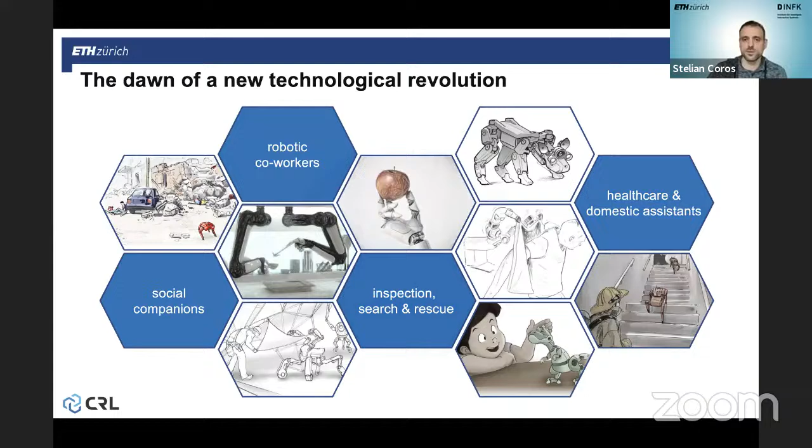If I had to summarize the work that we do, we split it up into three different pillars. First of all, we do a lot of work in physics-based simulation. Here, the overarching goal is to use these new simulation models to enable machines to understand how physical objects move and deform, to have the same kind of innate understanding that we do.

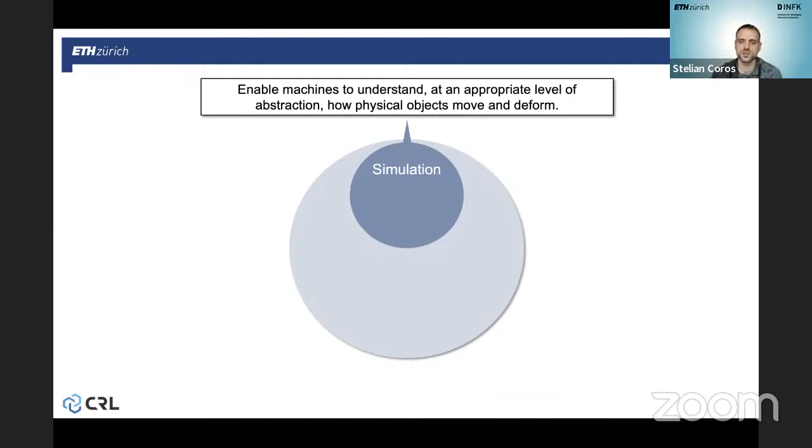Whether it is that we are folding a t-shirt or cooking our dinner, we always have an understanding of how the objects we interact with will behave. Using this understanding, we are able to plan and execute motions. In the simulation models that we're developing, I'm always interested in understanding how to make the most of the information that simulation models give us.

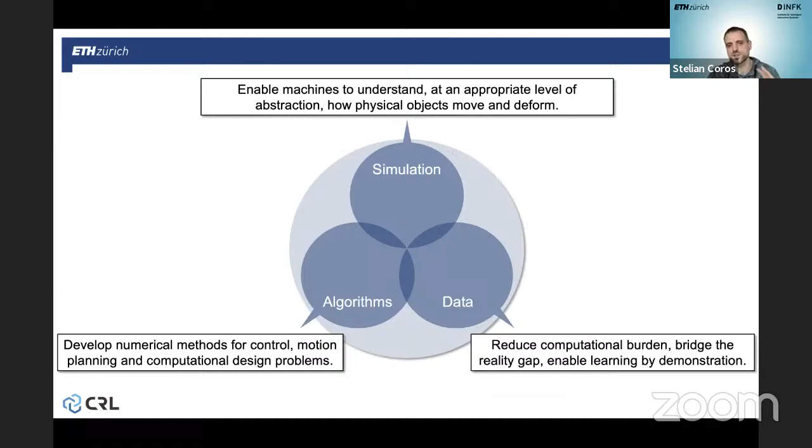Building on these simulation models, we develop all sorts of new algorithms for motion planning, for control, and also for computational or algorithmic design for new types of robotic systems. We also use data as much as possible to reduce the computational burden, to bridge the reality gap, to enable learning by demonstration, and so on and so forth. It's this fusion of simulation, algorithms, and data that we call computational robotics.

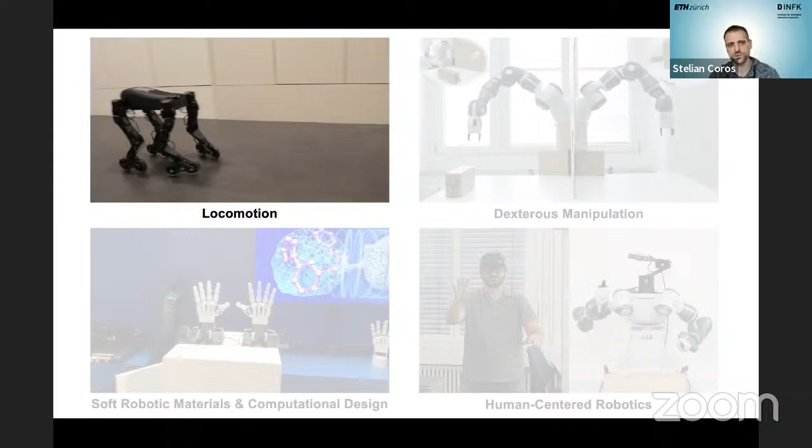In terms of the types of problems in robotics that we look at, we classify these more or less in four different areas. One is locomotion or mobility. Here, the overarching goal is to make robots that are able to go wherever people go. So for this purpose, we study all sorts of mobile platforms, whether it's legged robots or wheeled robots or hybrids, as we see here in this example.

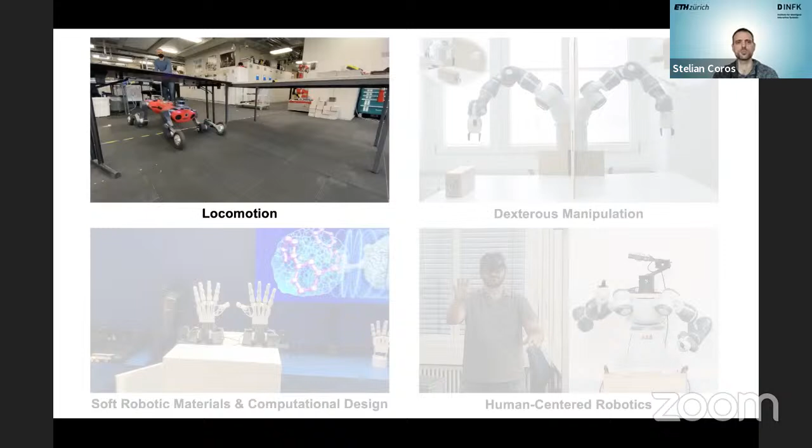We always try to figure out how to make these robots as agile as possible. And now increasingly, we're looking at mobile manipulation problems. So we want robots that are not just walking places, but are also able to start interacting with objects around them.

Speaking of manipulation, we have a dedicated focus in this area of dexterous manipulation. And here the goal is to make robots that are as skilled as people are. Hopefully we get there at some point.

And in my group, we focus a lot on agility and also manipulation of non-rigid objects. So we see lots of examples here. This is a dynamic behavior. This is another one. This is an example of interaction with a deformable object.

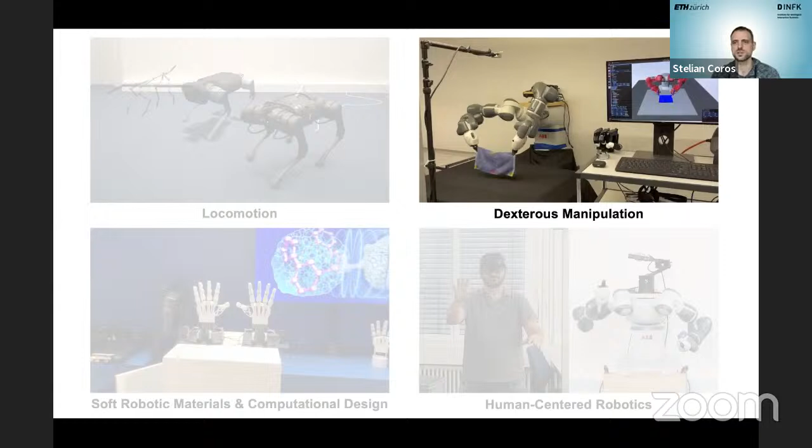So these are snapshots of the type of research that we do. And also we're trying to figure out how to create robots that are able to execute long-term motion plans.

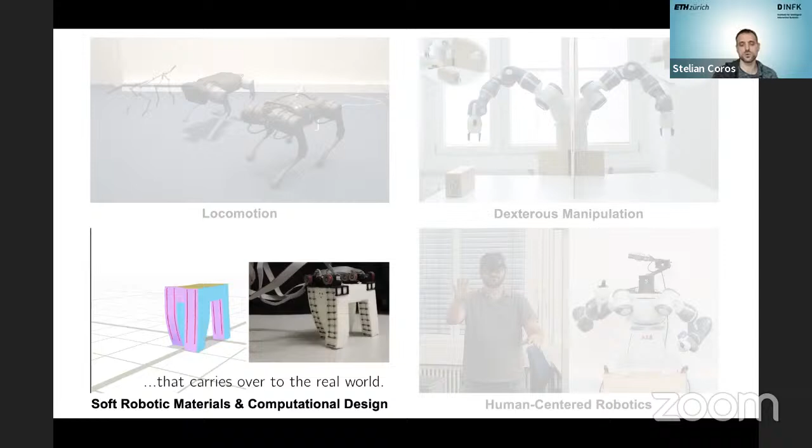We also have research in this area of robotic materials, and here computational design or algorithm-driven design is very important. So here we're inspired by new capabilities that are enabled by digital fabrication technologies that allow us to create entirely new types of mechanical systems. Compliance is kind of one of the defining traits of the systems that we study.

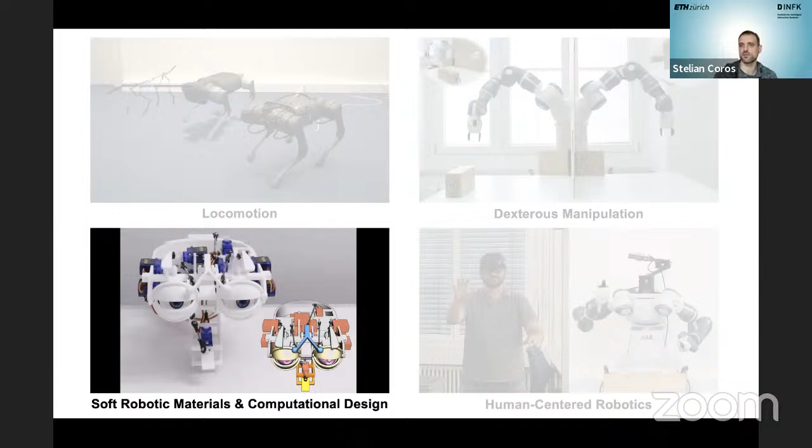And in this area, the space of design possibilities is very large, and typical engineering approaches that rely on creating a prototype, fabricating it, testing it, and then figuring out how to improve it, they no longer scale when you have access to thousands of design parameters.

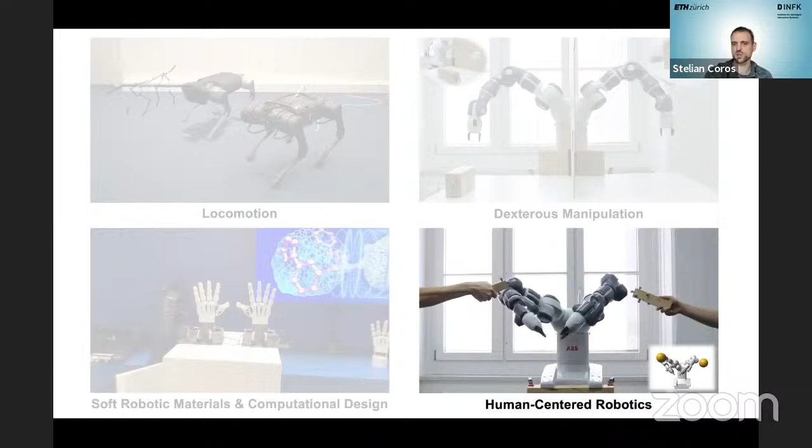And last but not least, we want to create robots that operate alongside humans, or they interact with humans. And so for this reason, human-centered robotics is also a key focus area for us, trying to figure out how to do very fast motion planning, enable intuitive teleoperation, as we see here.

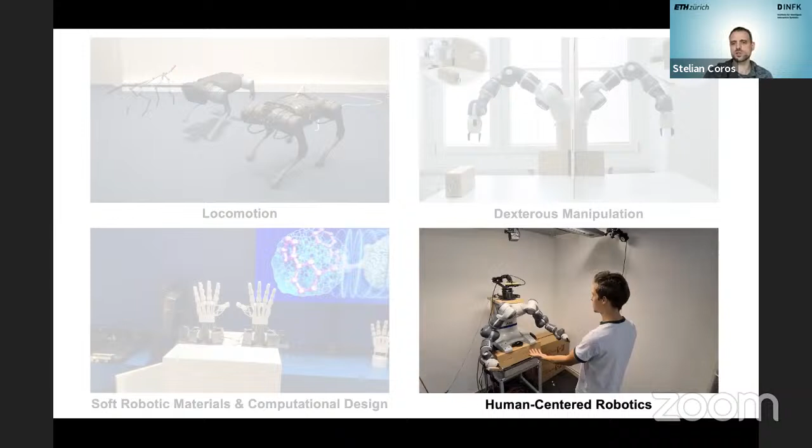And the overarching goal here is to try to figure out, in the future where robots will be all around us, how do we communicate with them, for example, using new mixed reality technologies? How do we share our work with them? How do we decompose it into the tasks that people are good at and robots are good at, and how to formalize that entire process?

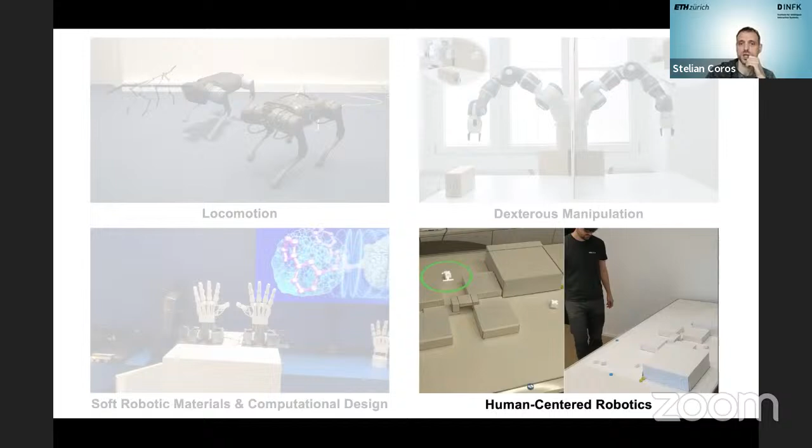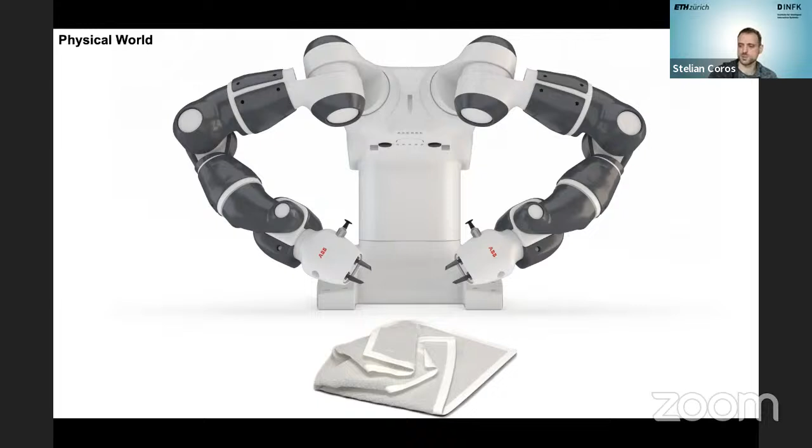All right. So in all of these different areas, physics-based modeling is a key component of the work that we do. And the reason why I like physics-based modeling is because if you do it properly, you're able to use simulation environments as a digital twin of the physical world.

And within these digital twins, robots can figure out how to do all sorts of tasks that we'd like them to do in the real world. But because it's a simulation environment, everything is safe. If a robot was to drop an object, well, nothing breaks. You can just restart the simulation.

And if you do this properly, then once a robot has fine-tuned its skills in the digital world, then those skills will hopefully transfer over to the physical world.

So I'll show you very briefly how we make use of simulation models to try to make robots more intelligent. And for this, I want to talk about a new class of simulation models that we've been working on, which is called differentiable simulation. So I'll tell you what that means without going too deep into technical details.

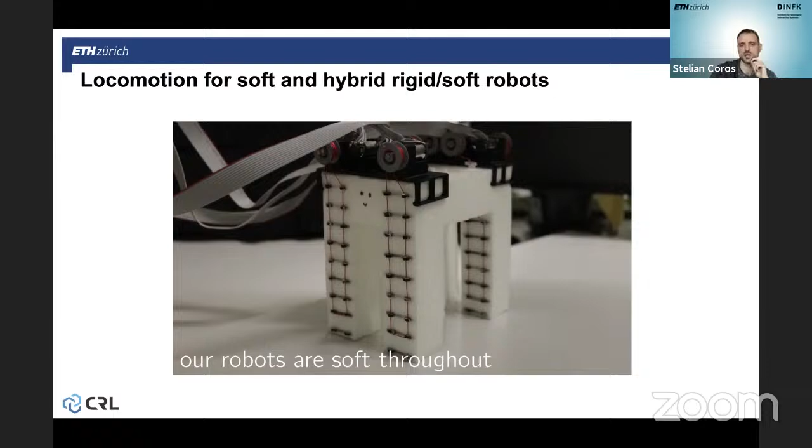And these motors basically can pull or push a cable that's routed through the legs of these robots. So by pulling on different cables, you can essentially activate the motion of the legs. Now here, we just showed that it's an entirely soft system. So the only rigid structure is the supports for the actuators, for the motors that we see on top.

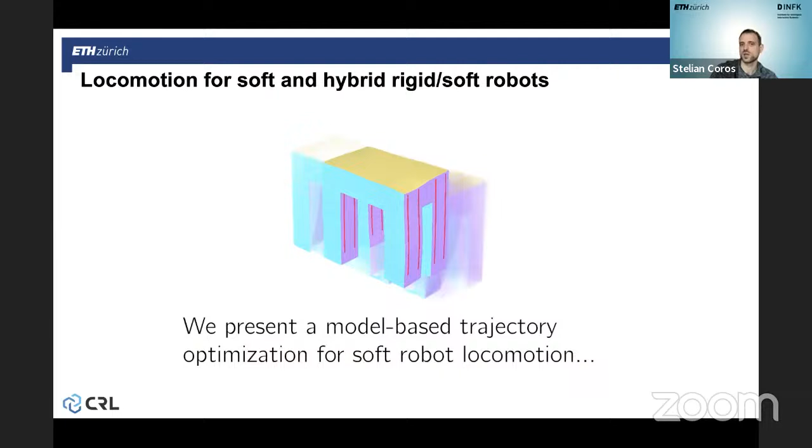And we can model this robot in simulation. And now using this inverse simulation model, what we ask it for is the input contractions of the cables that will make this soft robot move forward. So this is now kind of the result of the optimization. This all happens automatically. And here is the robot, the soft robot, that figured out how to coordinate all of its motors such that it can move forward.

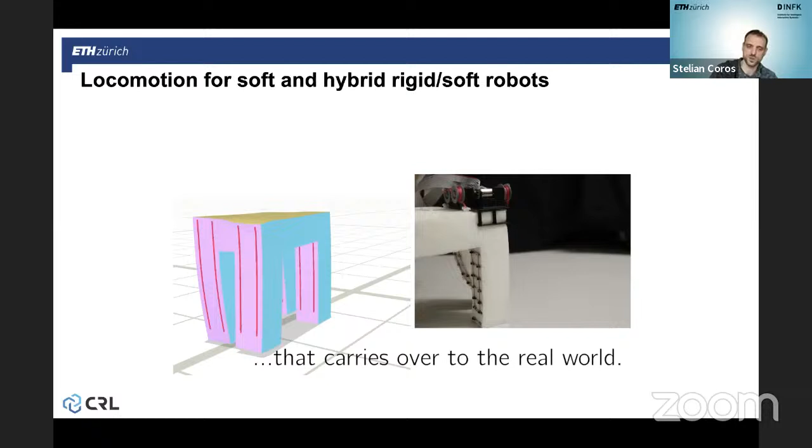So this is basically now an entirely soft robot that figured out how to walk entirely on its own. And again, it uses the same type of differentiable simulator that we saw earlier for the beach volleyball example. So I wanted to go only a little bit into details to explain more how this works.

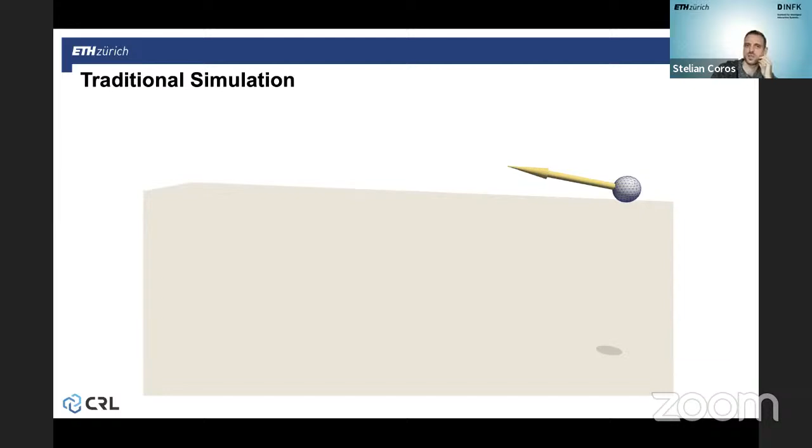So in a traditional simulation environment, we always have the description of the scene, so what kind of objects are we interacting with? What's the environment that these objects are going to be living in? But we also have input parameters, right? So these can be initial velocities, there can be trajectories of muscle contractions for the previous robot. They can even be material parameters such as Young's modulus, so basically how stiff the ball is, or Poisson ratio, all sorts of parameters that are input into the simulation.

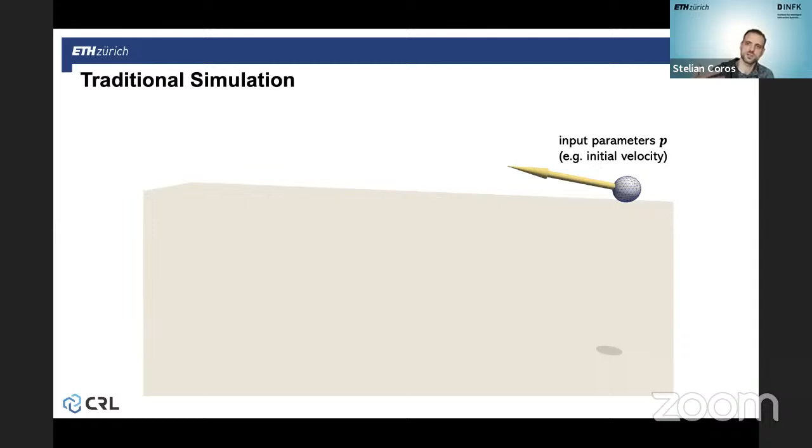And once we have these input parameters, we run the forward problem and we obtain some kind of trajectory like this. Now, you always have to discretize your simulation trajectory in time. So what that means is that you're really just predicting the position or the configuration of the objects you're simulating at specific moments in time. So we're going to call this x1 for the first moment in time, x2 for the second moment in time, and so on and so forth.

And a traditional simulation environment will output this x of p. So basically the trajectory of the object over time as a function of the input parameters.

Now, for a control problem like the ones I've shown, what you also want is a way of specifying an objective. So, what do you want the final configuration in your simulation to look like? For the beach volleyball example, or for this example here, this objective can be very simple. It can just measure, for example, the distance between the position of the object at the last moment in time and its target location, right? So it's a very simple sort of objective.

And if you are trying to solve this control problem as an optimization problem, then what you need to do is compute at least gradients of this objective. Now, if you do the chain rule here, what you obtain is an expression that looks like this. So there are some partial derivatives, there are some total derivatives. Hopefully you remember the difference between them. Partial derivatives are all very easy to compute.

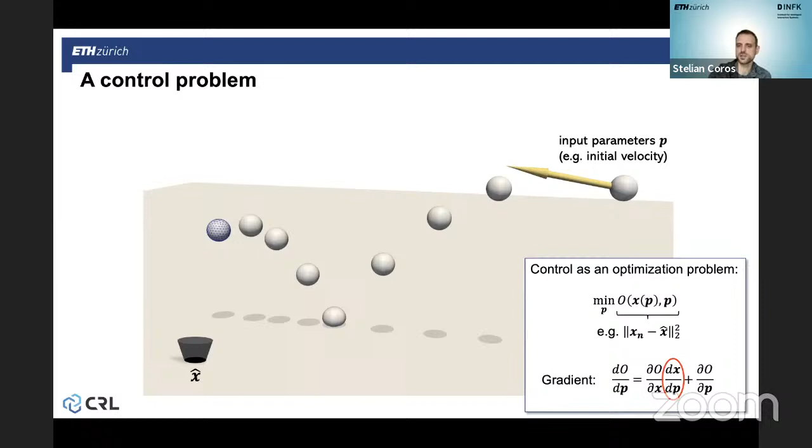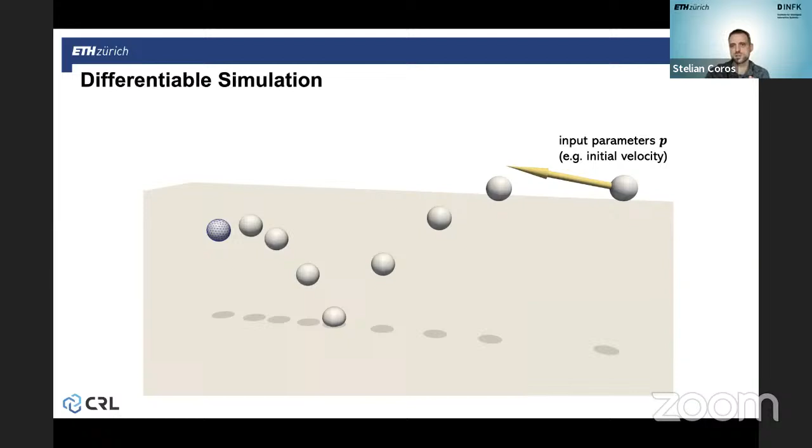The tricky part here is this term. So this term, we're going to call it a Jacobian, and it tells us how a change in the input parameters will affect the trajectory that we compute through simulation. So here is a visualization of what this Jacobian encodes. So I just show you what happens here as you wiggle the input velocity.

You see here in the frame, in the mesh sort of visualization, this is basically what this Jacobian encodes: how will the entire simulation change if you're changing some of the input parameters for the simulation? So you can see it predicts how the ball will bounce higher, or move further or closer to the initial position, as a function of the initial velocity.

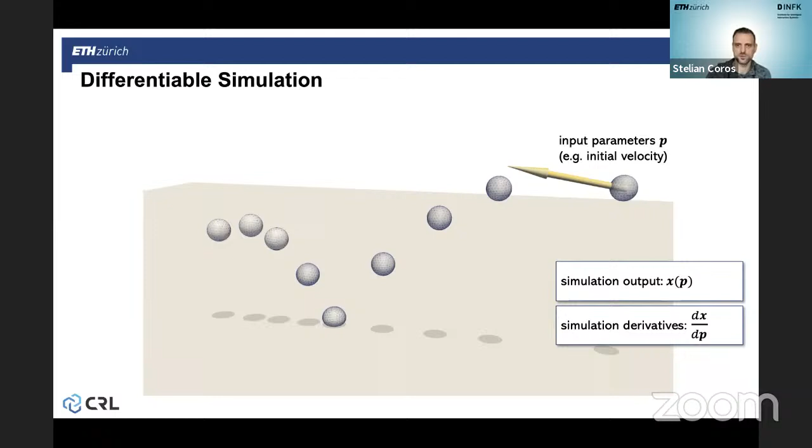So these simulation derivatives are very important, and this is what a differentiable simulation outputs: not only the trajectory that you computed through forward time stepping, but also these derivatives. I don't want to go into details on how we compute these derivatives—it's a little bit involved—but if you're interested, there are papers on our publication website where you can find all of the details.

Essentially, if you have a differentiable simulator, you can compute gradients of whatever control objective you might have, and then run standard gradient-based optimization methods like gradient descent or LBFGS, or even higher order methods like Newton-Raphson or Gauss-Newton. Together with a line search mechanism, you can get very reliable convergence to a local minimum of this objective.

All right, very good. So this is a quick overview of the fundamental inner workings of a differentiable simulator. Now I just wanted to walk you through some of the use cases we have been exploring in our lab that all build on these differentiable simulators that we've been formulating.

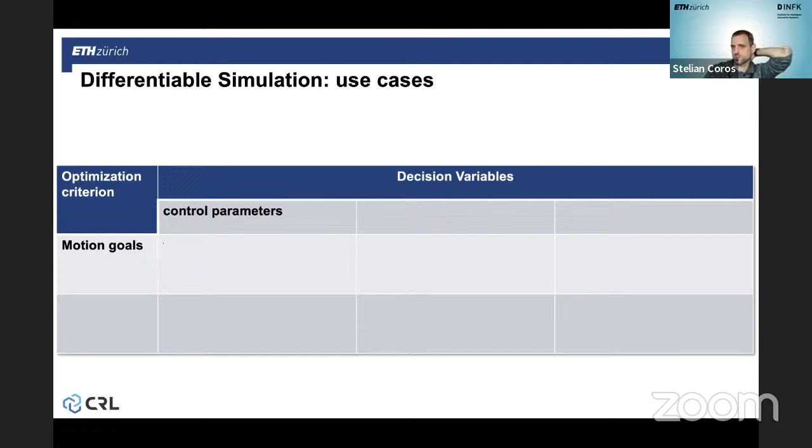Here, we have a lot of flexibility in what we choose in terms of optimization criteria and decision variables. Perhaps the most straightforward option is to have simple motion goals, like we've seen with the ball—just a target for the end of the simulation trajectory. If the decision variables are control parameters, this corresponds to whole body control problems, model predictive control, or trajectory optimization. These are all standard techniques, but now we can build them on top of a differentiable simulator. I'll show you some of the work we've done in this space.

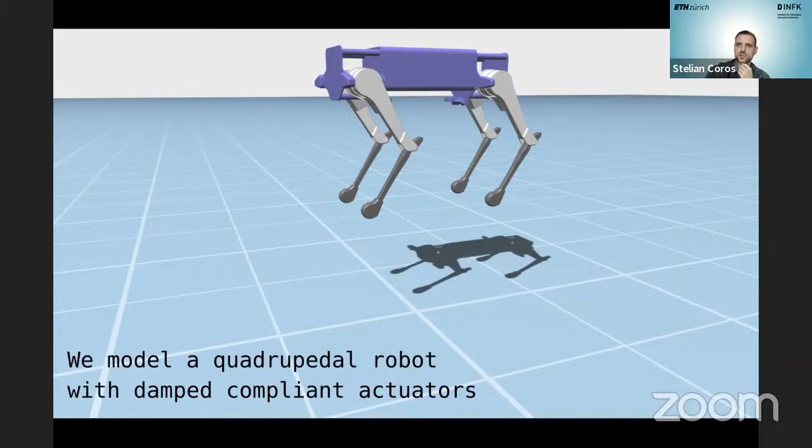One application I'm very excited about is robots that are increasingly more bioinspired—meaning they start to approach the mechanical complexity we see in nature. In nature, animals have an internal rigid skeleton, but also a lot of compliant body parts, whether it's the feet, the ligaments between the bones, or even the muscles themselves, which are relatively soft springs if you want to think about them this way. This is basically one of the defining characteristics of living creatures, and I would really like to see robots that are more organic in their mechanical design.

But as soon as robots become more organic, they're also much more difficult to model and control with existing methods. So here we've taken some of the first steps to show that differentiable simulators can be a really good tool we have at our disposal for these problems.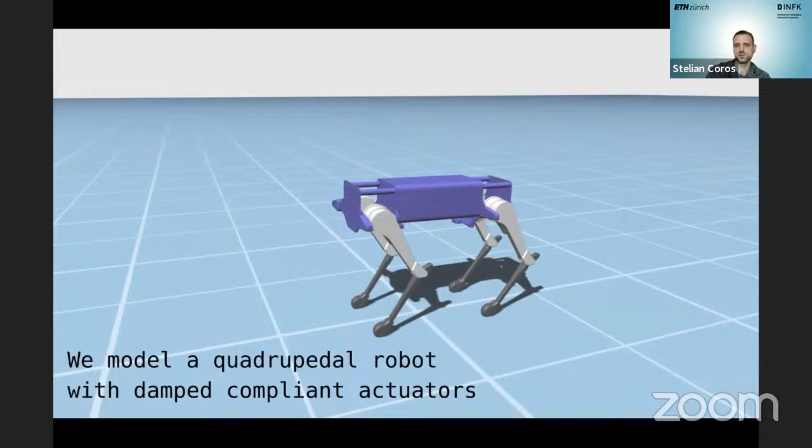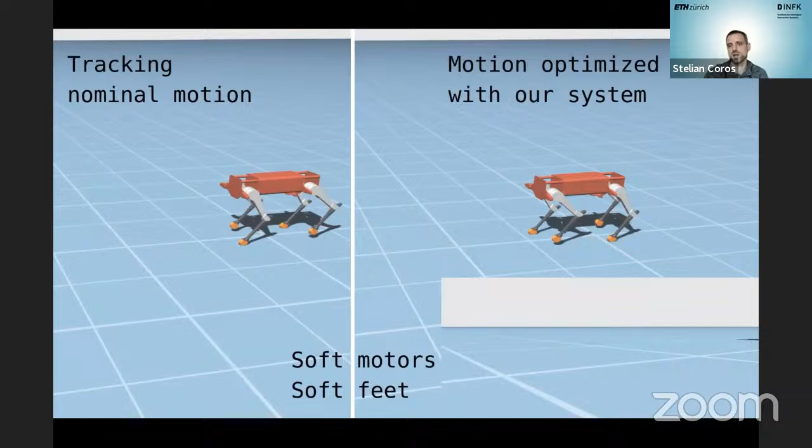What I wanted to show here is basically what happens if you do trajectory optimization using a standard model, but then apply it to a robot that is somewhat soft, with a bunch of sources of compliance. This is the motion that was planned, but when you actually execute it on the robot, as we see on the left, because the compliance wasn't taken into account, the robot will just not perform in the right way. On the right here, we see what happens if you use our differentiable simulator.

Now, this is an example also with soft feet. It's able to account for all of these sources of compliance and generate motions that embrace compliance rather than just treat it as a necessary evil that's present in every mechanical design.

So for locomotion, I think there is a lot of opportunity for such a model, but also for manipulation. That's probably an even bigger topic, given that most of the objects we interact with on a daily basis are actually compliant—they're soft. So we also need the same type of methodology in order to teach robots how to do the sort of things that we do so easily every day of our lives.

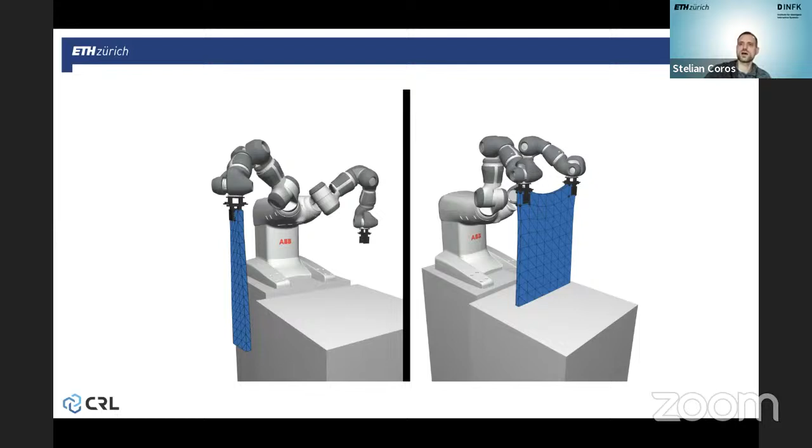This is a Yumi robot from ABB, a dual-arm robot, and it's holding in its grippers a sheet of flexible foam in this example. And what we asked it to do is figure out how to control its hands so that it starts to lay this foam sheet flat on the table that's in front of it.

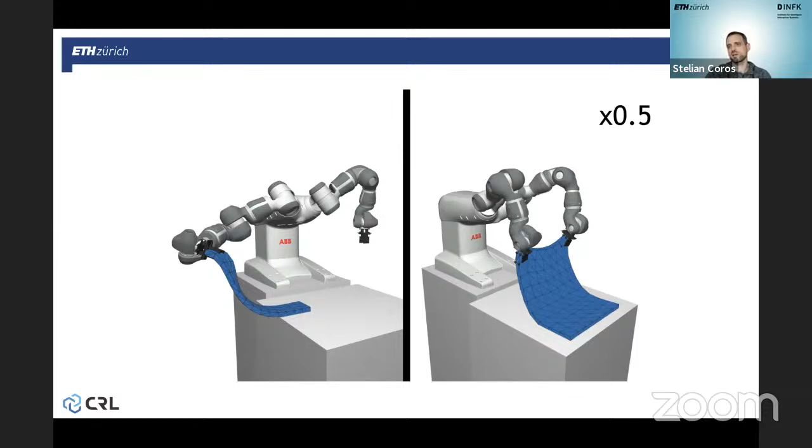So here are the results that come up in simulation. You see that there's some anticipatory behavior, really leveraging the dynamics of these systems. And then, as a result of the physics, they end up starting to lie flat on the table. And now we take these actions that were discovered in simulation, and we have our robot execute them while holding a similar piece of sheet of foam. And here are the results.

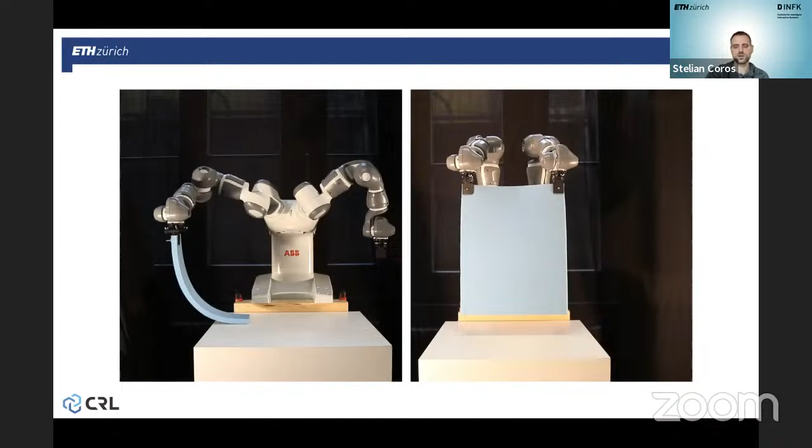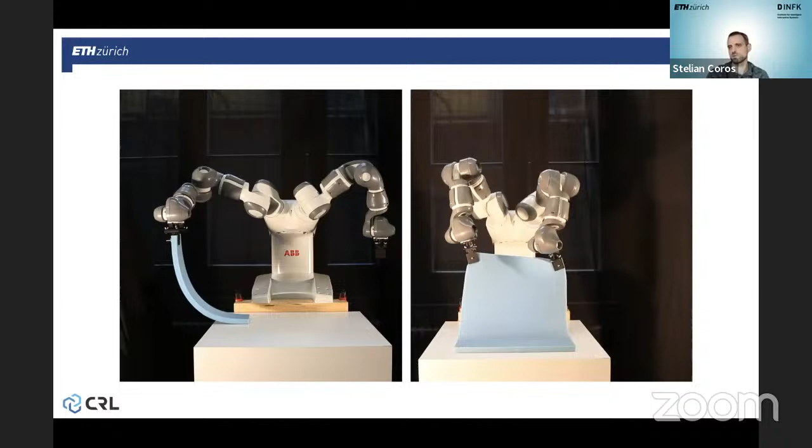So basically, it shows that these simulation models have quite a good predictive capability that can be used for motion planning, and then it allows robots to perform the sim to real step in order to really interact with physical objects. So I mentioned earlier on in the talk that our long-term goal is to have human-level dexterity.

This is an example from a sorting or distribution center from Amazon, and it shows you how people currently do these relatively simple tasks, just making sure that the packages have the right orientation on the conveyor belts and that they go in the right path. You see, it's very dynamic behavior, lots of dual-handed manipulation behaviors, very dynamic also.

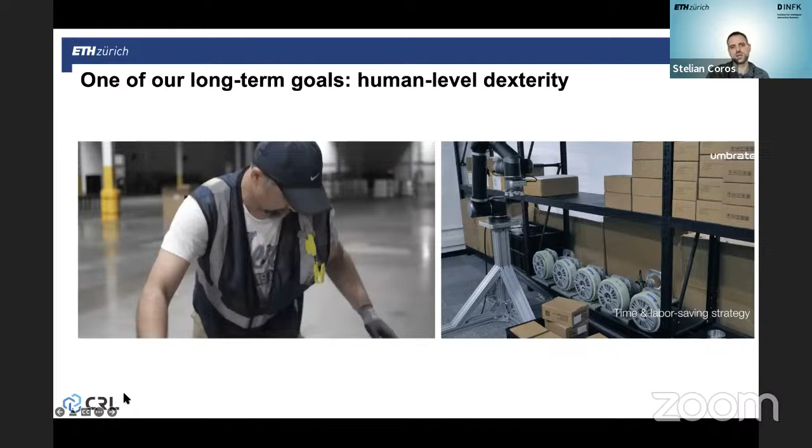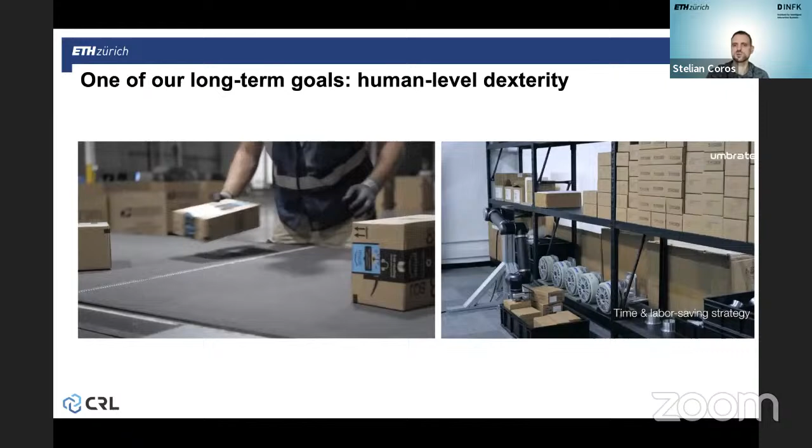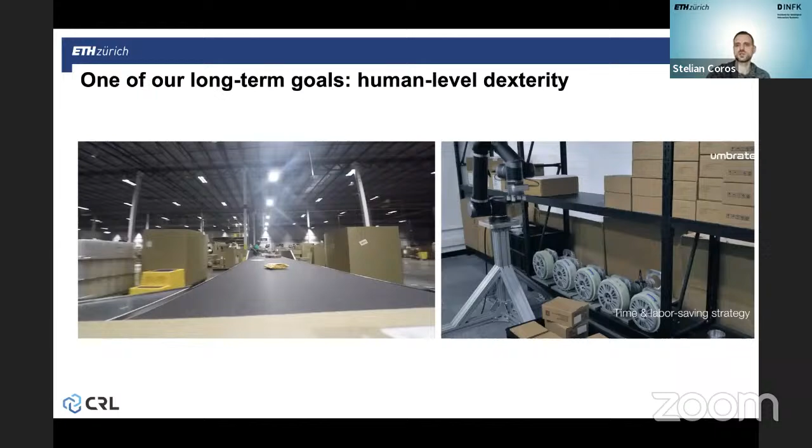And I think if we look at how the person is doing processing of these boxes and we see how a robot is doing it, we see that there is a pretty fundamental difference, right? So most robots today that are used for real-world applications, they do this very simple pick and place. They always pick from the top and are just able to pick up the object and place it somewhere else. This is one of the types of limitations that we would like to overcome.

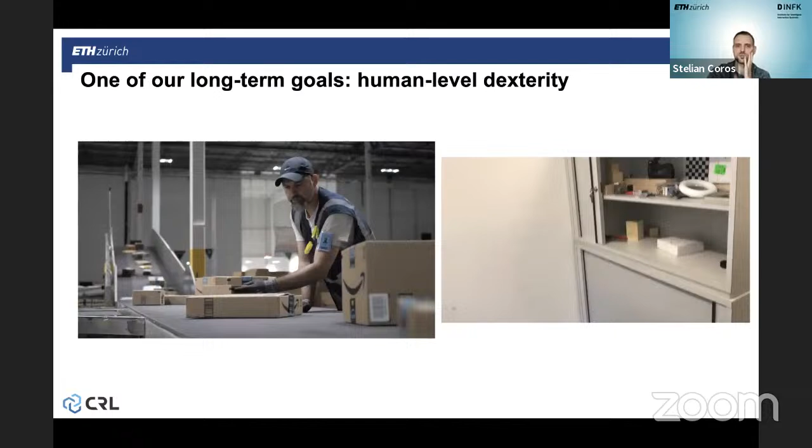And one of our early examples in this is this very dynamic tossing behavior. It approaches maybe a little bit what we see this human worker doing in the video on the left here. All right, so these are maybe some of the main types of problems that we want robots to solve, but we don't have to stop here.

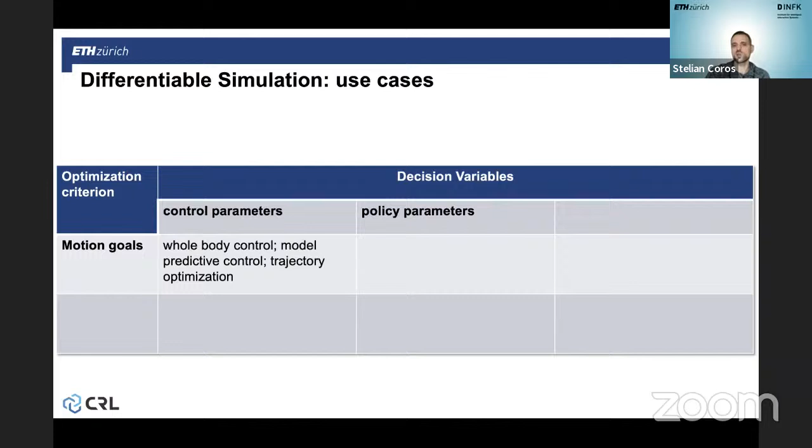If instead of control parameters, so joint angle trajectories or joint torques, what we optimize over is policy parameters. So you can imagine here that you have a neural network with tons of parameters that control the mapping between inputs and outputs. If we take exactly these parameters and we optimize for them using our differentiable simulator, then we can use this kind of system for self-supervised learning or policy optimization, which I think is very exciting. So here is a simple example of a test that we made.

What we did here is we had a neural network that encodes a policy, right? So a policy is a mapping between states and actions. Now, the actions that are predicted by the policy are fed into this differentiable simulator, which is treated as a specialized layer in an even bigger neural network. The simulator outputs a motion trajectory that corresponds to that set of actions that the policy output, and then we can formulate the loss directly on this output of the simulator.

And if we train this kind of big neural network all at once, then we're able to solve the self-supervised learning problem. So the policy is learned automatically, just using the loss as a guiding objective. So here is a simple example where we use this. What we have here, you're going to see in a second, is a robot that plays a beer pong inspired game.

So in beer pong, I've never played myself, so I don't know, but my students told me, you have a ping pong ball, you have a whole bunch of cups filled with maybe an adult beverage or something like that. And the goal is to throw the ping pong ball such that it bounces once and then lands in a cup. So you can solve any instance of this problem using the differentiable simulator.

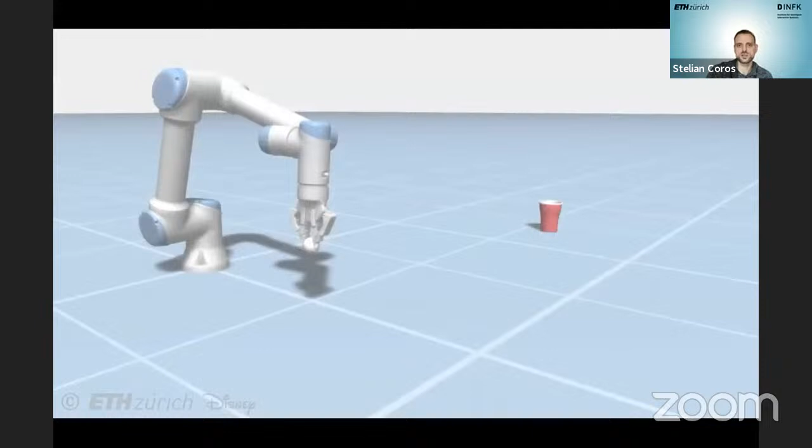And the result here is that once you have the robot kind of see where the cup is, it can immediately use the pre-computation that we had before to figure out what the result of the policy is, and then it bounces the ball, which then, in the cases that we've seen here, directly falls into the cup. So it doesn't have to solve these inverse problems at runtime because it already learned the solution space for them.

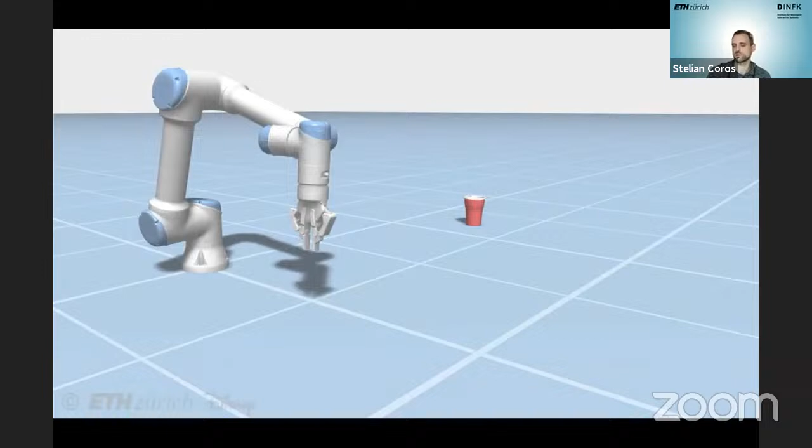And there's actually a lot to be said on this topic. One of the reasons why I like it so much is because it really builds a bridge between traditional trajectory optimization and sort of policy optimization. So basically in trajectory optimization, what we want is to compute the optimal actions that minimize an objective. And for policy optimization, or the self-supervised learning step that I showed before, we have the same type of objective, but now it's integrated over the space of problems that we're interested in.

And what we're solving for is not directly the actions themselves, but rather the parameters of the policy that will output appropriate sort of problem-dependent actions. And there's a lot to be said here in terms of how you formulate this policy optimization process such that the policy that you learn is as effective as possible. So we have a few papers on this that you can take a look at if you're interested.

All right. Okay, so we can optimize over control parameters. We can optimize over policy parameters. Now we can also, of course, directly optimize over model parameters. So I'll show you what I mean by this, maybe with an example so that it's most clear to understand. And once you do this, you can solve what we call computational design problems.

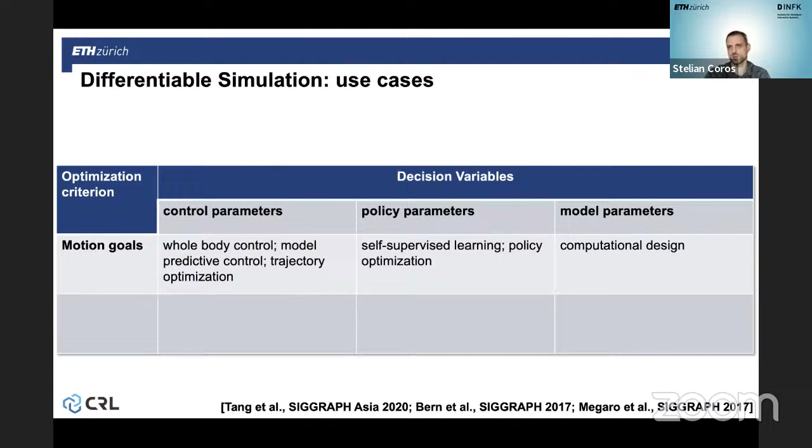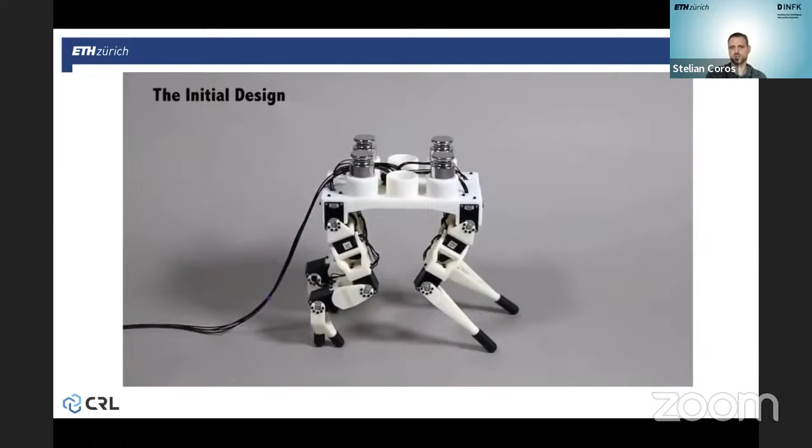Okay, so here's an example. We have a robot. We had an engineer sort of design and build it. It's a quadrupedal robot. And once this design was finalized, we figured out how much weight we can put on top of the robot such that it can still walk without saturating the limits of the actuators. All right, so this is the motion that is optimized for this particular robot. So now this is basically just at the limit of what it can carry.

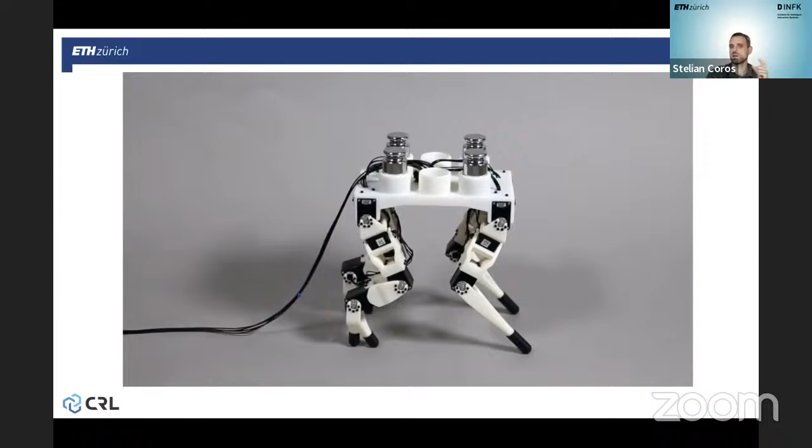And now we ask the question, well, can we optimize the mechanical design of this robot, in particular the dimensions of the limbs, such that with the same motors, it is able to use less torques while it carries this payload? So here is the optimization process where we're just visualizing the way in which the design of the robot changes.

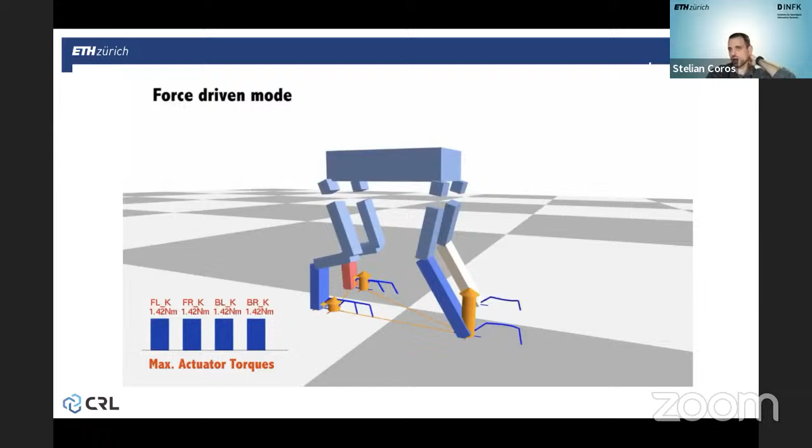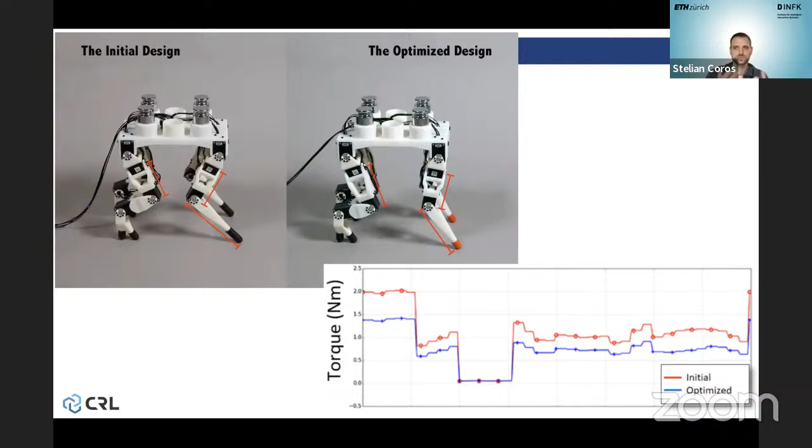And here it is. So it ends up walking with the front limbs in a more straight configuration. It also changes the dimensions of the hind legs. And at the end, it reduces the maximum actuator torques over the walking cycle using this mechanical design. And once we build the new design and we just measured the required torques, we saw quite a noticeable improvement that was directly a function of this design, which was optimized through numerical simulation via a differentiable simulator.

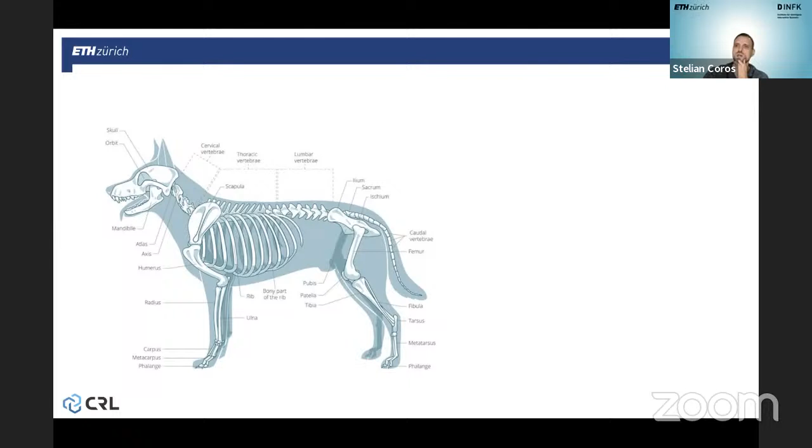So this is still early work, but I think this is really exciting because it gives us the opportunity to think about co-design problems where at the same time you want to figure out how to optimize concurrently the brain or the control policy of a robot together with all sorts of design parameters, whether it's the structure of the load-bearing mechanical parts, essentially the bones. How do you make sure that they are sufficiently strong but as lightweight as possible?

The selection and placement of actuators, maybe entirely new types of geometries for the joints, compliant feet, and so on and so forth. But this methodology now gives us a principled way of thinking about the way in which the mechanical design and the control policy can be optimized together in order to really improve the functional capabilities of future generations of robots. All right.

If you have a bunch of data that you can use to formulate the optimization criteria, then basically this would take on the form of sort of model data mismatch. And I'll show you a few examples of the type of problems that we can formulate using this.

So if you have just motion data that comes from motion capture, then you can start to ask these controllers to minimize the difference between the motion that's generated through simulation and the motion that you've captured from a real animal. And that allows us to create motion controllers for robots that are able to reproduce motions that we capture from real animals.

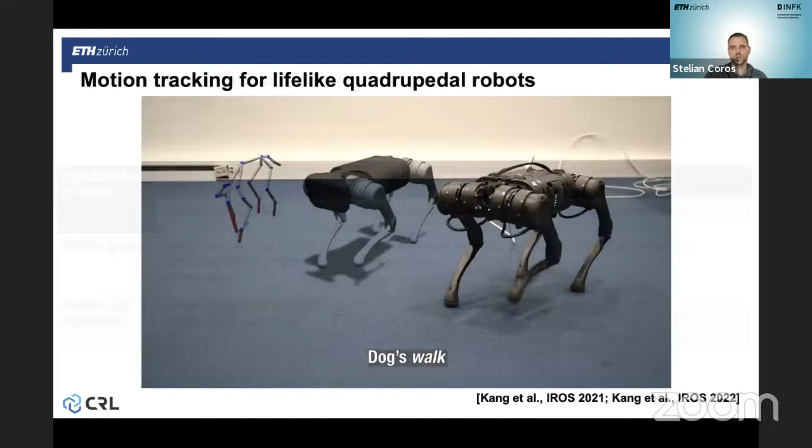And now, as a control problem, what you can try to do is you're just asking the behavior of a new type of towel to match the same type of behavior that we saw in the demonstration. Now, why is this important? It's important because for really complex problems, the objective is otherwise very difficult to formulate, right? Like we don't have a mathematical formulation of what fold a t-shirt neatly should look like. But if you provide a demonstration, then you can just say, well, do it like this, right? So this is basically the way in which we can use a simulation.

And now the challenge specifically for this towel that we're working with here is that as you're changing the proportions of the towel, the dynamics also change quite a bit. So the time constant, how long it would take to get to the apex of a swing, for example, that's going to be very different as a function of the dimensions of the towel. So you have to be a little bit careful with how you scale the demonstration in time and space.

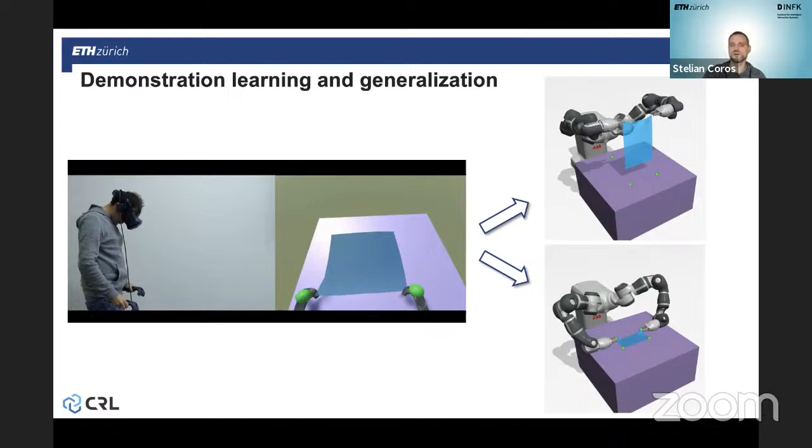So together with the mechanical properties of the silicone, it creates a very dynamic physical system, maybe a future robot hand. And if you're trying to figure out how do you import this into a simulator so that you can use it for motion planning and control? Well, on its own, that's actually a hard problem. And if you want to use the right resolution for the spatial discretization of this object, you would probably need to have a lot of simulation elements in order to capture all the intricate geometry.

So what we wanted to do is just have a very simple proxy simulation model, but we optimized its material parameters. So things like Young's modulus, Poisson's ratio, internal damping, and viscosity coefficients. And what we wanted is to automatically optimize for these parameters such that the overall behavior, basically the vibration modes, match the ones that we observe in the physical specimen.

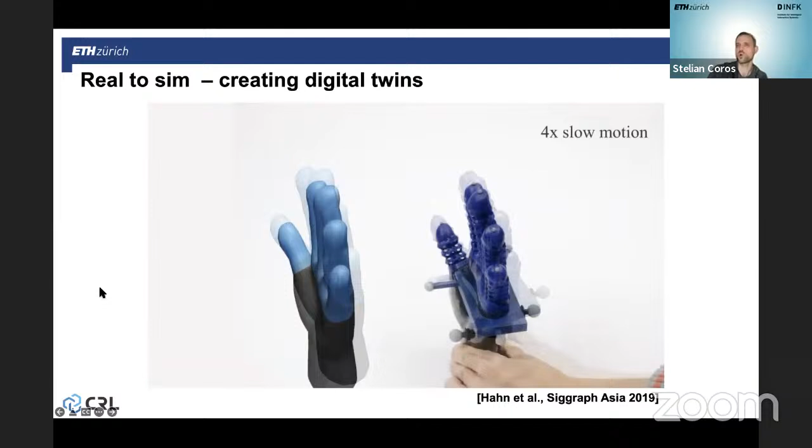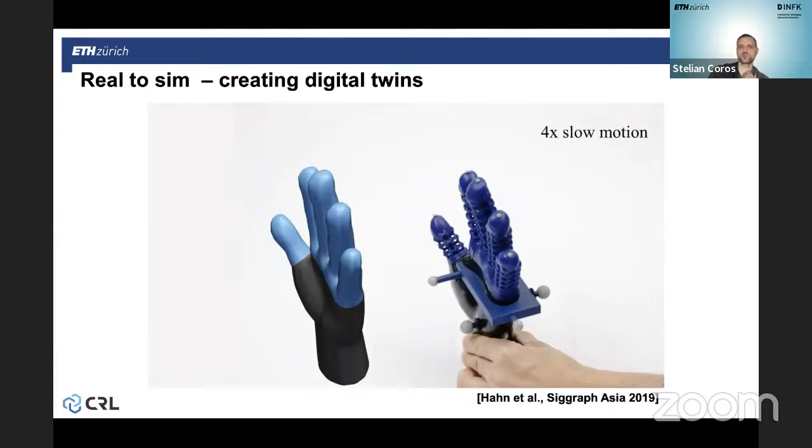So that's what we see in the virtual model on the left, a quite coarse simulation model that behaves in a way that quite accurately captures the behavior of the physical specimen. And then this model, once you've imported it in your simulation environment, now you can use it for motion planning. This is something that we've done for this example.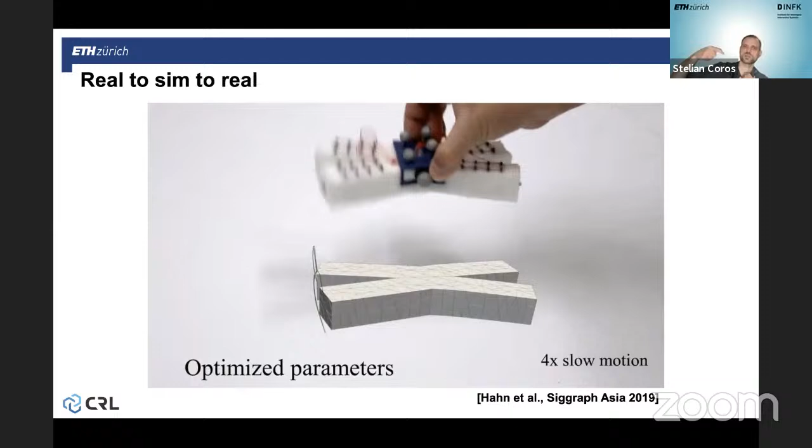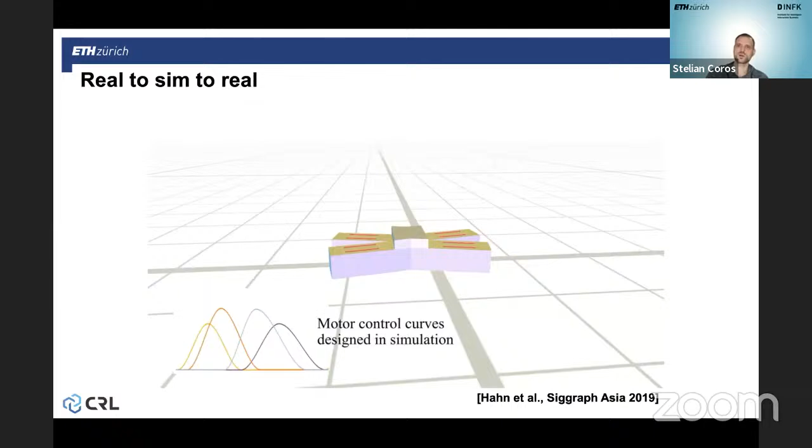This is another soft robot. It's a crawling robot. This is the first step where we're just inducing some dynamics so that we are able to optimize the simulation model to match the physical specimen. And then in the simulation environment, we can design a gait. This is a similar setup as the one for the soft robot that we saw earlier on. It has motors that pull on cables, which then induce deformations.

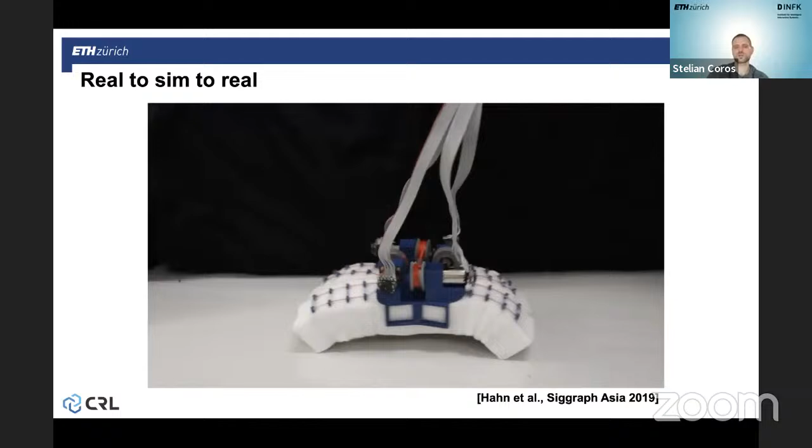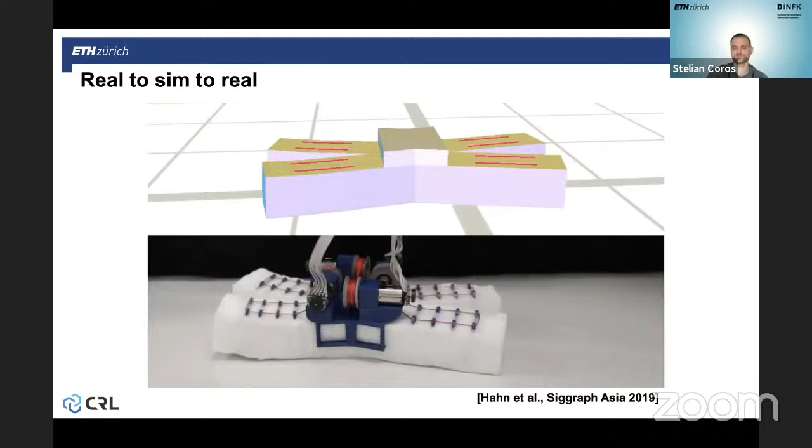And because this model was tailored to the physical specimen, when you take the control policy and you apply it to the physical system, the behavior that you see actually matches the simulation environment quite well. So here we can see simulation versus real prototype. All right.

So this concludes the summary of the work that we do in simulation models and the various ways in which we use it. Oh no, sorry, I had a few more slides. I forgot I added these. So this is basically more pointing towards ongoing or future research directions.

So we ask questions like, how far can simulation models take us? Is this the key to solving all sorts of manipulation problems or locomotion control problems, or will we hit a barrier at some point? Another important question is, where do the models come from anyway? So we have some intermediate results for this question, right?

We can have this real to sim step where we essentially do system identification, but for pretty complicated types of physical specimens. But at the end, there are all sorts of details, whether it's geometric or dynamic parameters, that are perhaps still difficult to automatically infer just when a robot sees a new object for the first time.

And another very important question that we're also starting to tackle is how do we ensure safety and efficiency as we are learning control policies or dynamics models. And I wanted to show you some of the latest work that we've done here. So in everything I've talked about so far, we have a relatively traditional simulation model as a base for all of the work that we do.

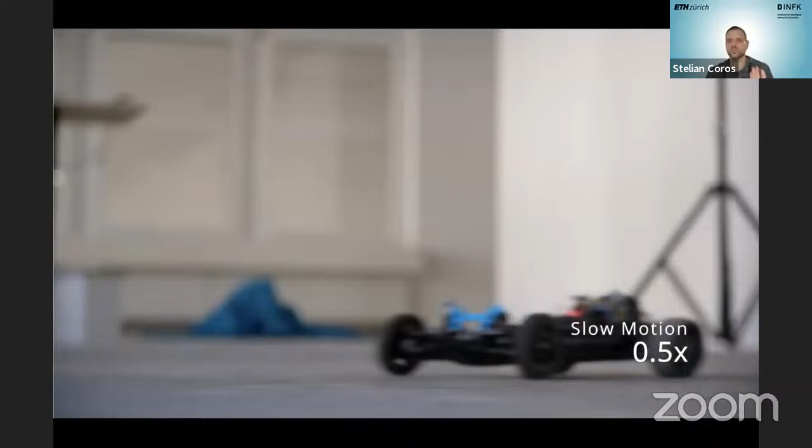And the system that we've applied this to is an RC car. You can see it here. So this is a nice example because the RC car actually is quite complicated to model accurately, especially if you try to capture the drifting behaviors. You know, the mechanical design is actually quite complex. It has a lot of springs and damping elements. It's a very dynamic system.

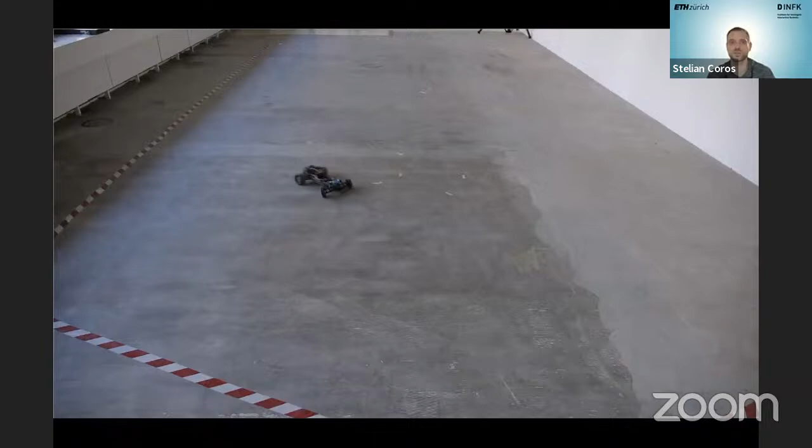And what you see earlier on is that basically in the beginning of this project, we just want to provide random joystick signals, and we always just capture the way in which this RC car responds to the joystick signals.

Once we have this, we take the Jacobians of the neural network that tell us how the output changes with respect to the inputs, and then we can start solving the same types of control problems that I showed you earlier that are based on a numerical simulator. And this ends up working surprisingly well.

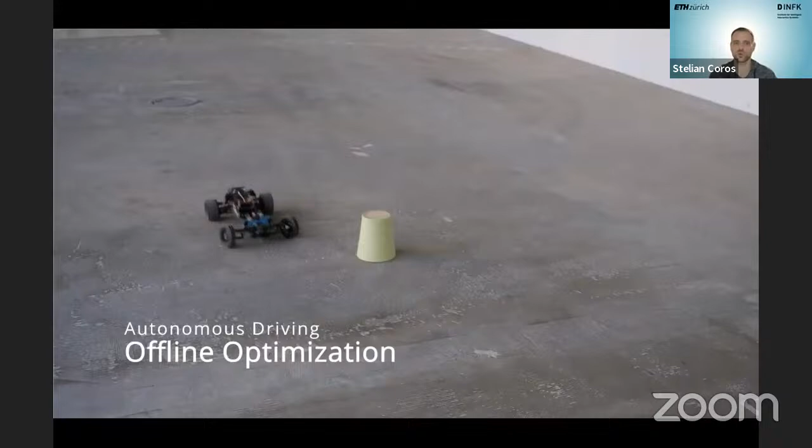So I think it can be a very powerful tool that we plan to explore more in the future. This car, without knowing that it can drift or even what drifting is, observes that it has these behaviors and starts to leverage them as you're solving new types of control problems.

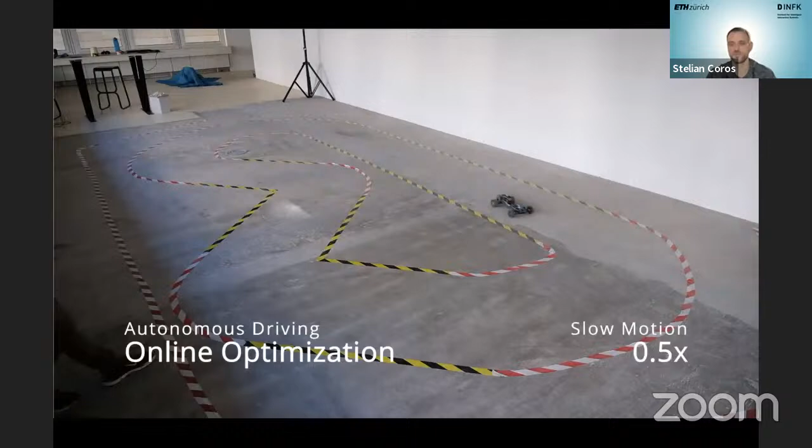All right, very good. So this is now the conclusion of the technical part of the talk, but I wanted to spend 2 more minutes to talk to you about ETH Zurich and some of the possibilities for joining us. ETH Zurich, for those who maybe aren't so familiar, is one of the top institutions in mainland Europe. It's actually located in the center of Europe. There are about 25,000 students that attend ETH and about 4,000 or 5,000 PhD students, so it's actually quite a research-heavy institution.

I can spend a lot of time talking about how great ETH is and how beautiful Zurich is as a city to live in, but maybe you can also do a bit of research on your own if you're interested. There's a big population of international students that attend ETH, and there are a few different ways you could think about joining us if you're interested.

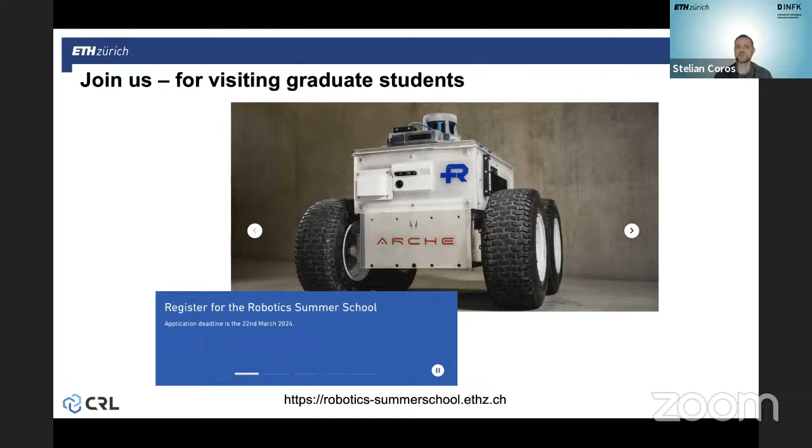For visiting graduate students, we have a robotics summer school. This is particularly relevant for the topics I've talked about here. Again, a very competitive program, but a nice opportunity to come and spend 2 months in the summer at ETH, working with one of the professors specializing in robotics, and interacting with a pretty diverse set of international students who join this program.

And last but not least, we also take on PhD students from all over the world. What's worth mentioning on the doctoral studies side is that ETH has a decentralized admissions process for PhD students, meaning you would have to get directly in touch with the professors, figure out if there is a project that's a good fit for you and for the professor. If so, you can basically start at any time of the year, as long as you have a master's degree. A master's degree is required for PhDs at ETH.